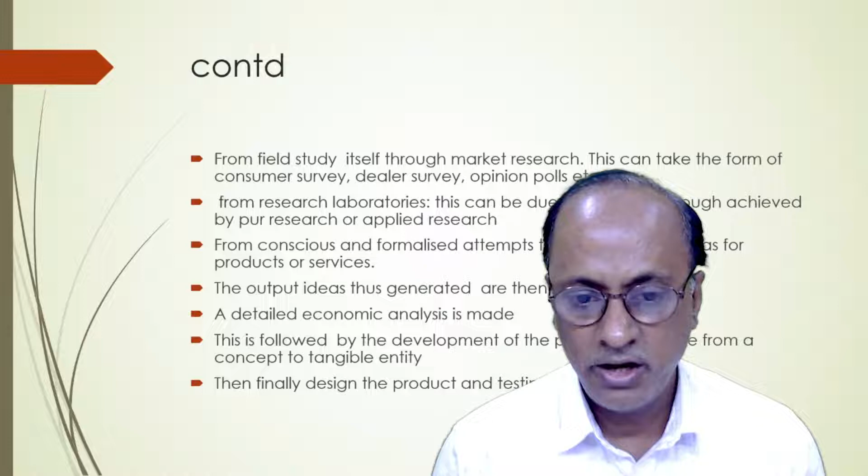And finally, design the product and test the product. When you design the product, many things come into our mind. First thing is product design. Product design contains product variety.

In product variety, there are two distinctly different priorities that can affect the design of a product or service. What are the priorities? The higher the standardization, the greater the ease in producing. Standardization means producing similar type of products in large volume.

But there are certain advantages in standardization. We use the same types of raw materials. We may use the same type of process. So we purchase raw materials in volumes. We may get certain discounts. So our unit cost may decline.

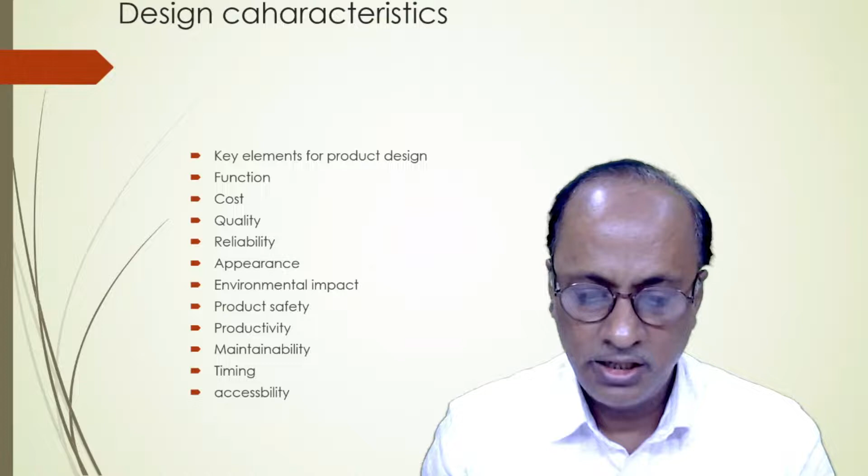Next comes process selection. Now once the product design is over, we move to process. Process selection is nothing but the ways the organization chooses to produce the product.

Process selection can simply be said as: whatever design, whatever product we selected, how we will produce that, what are the methods of producing that, and how we will provide the goods and services. It involves the methods we use to produce the product or provide the goods and services, including choice of technology, type of processing, and so on.

When you make a process selection, we have to decide the technology, what type of technology we are going to use, and type of processing. As I told you in the last class, there are different types of processing. It influences our capacity planning - as I told you, capacity planning means how much I should produce, what capacity my organization should have, so that I can meet the demand of the customers.

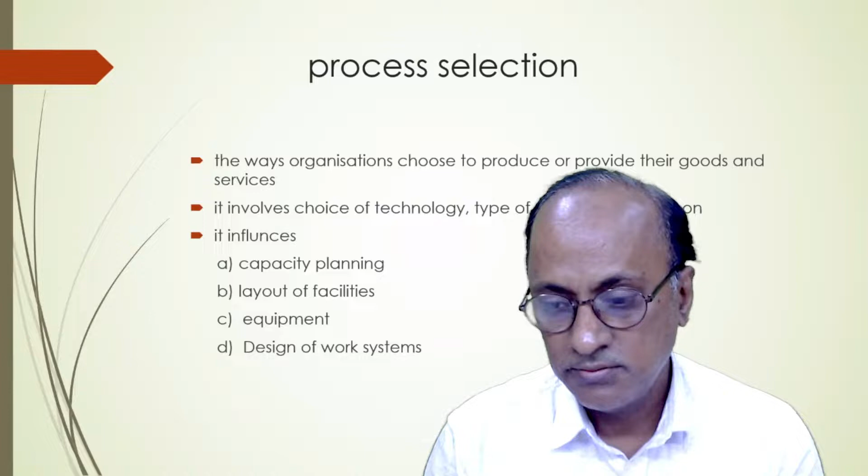So before going to the next slide, I can say that process selection is the method, the ways the organization chooses to produce or provide their goods and services. It involves choice of technology, type of processing, and so on, and it influences your capacity planning, layout of facilities, equipment, and design of work systems.

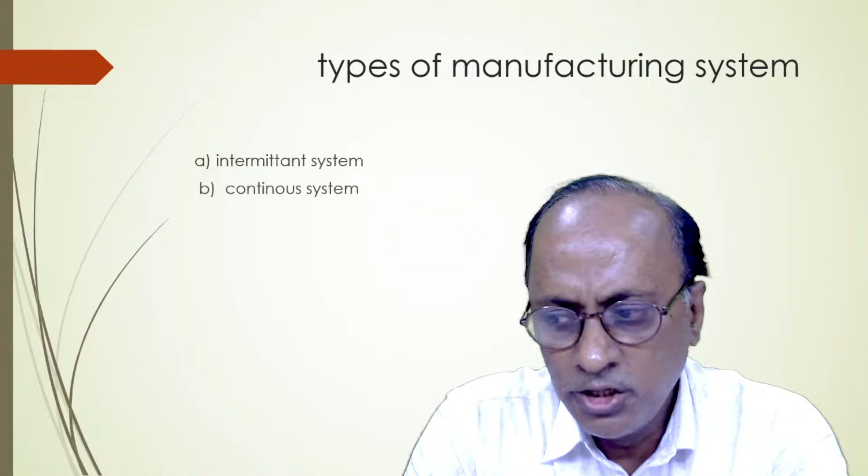There are different types of manufacturing systems: intermittent system, continuous system, and as I told you, we can also add batch system, job shop system, or project. All these are types of manufacturing systems. But basically, we can take manufacturing systems into two parts or two categories: intermittent system and continuous system.

What is intermittent system? Goods are made to specifically fulfill orders made by the customers rather than for stock. Production systems are flexible. Workloads are generally unbalanced. In-process inventory are large. Highly skilled operators are required. It needs high investment. Elaborate sequencing and scheduling are required.

Now, first, the definition of intermittent system: intermittent means we produce in intervals, we don't make a continuous production system. Here, goods are made to specifically fulfill orders. If customers come to me and ask me to produce something, I produce the product, and whatever date I have committed to the customers, on that day they come and collect their stitched clothes rather than for stock.

Now, in an intermittent system, I can give the example of a tailor. Many customers come and give their measurements and specifications, and the tailor stitches the cloth. He does not stock them, and he fulfills the orders given by the customer - whatever orders the customers have given, accordingly he fulfills them.

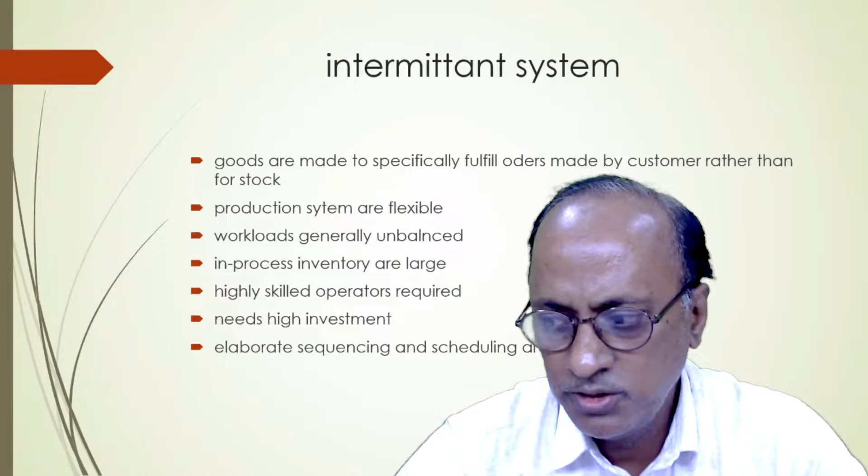In contrast to intermittent system, there is another system called continuous system. As distinct from intermittent flow process, all outputs are treated alike in this form of processing, and workflow is relatively continuous. The variety is small and volumes are high, making it worthwhile to focus the transformation process on the output. This requires arranging facilities in the sequence required for the output, using high-speed special purpose machines.

Now, if you compare intermittent system and continuous system: in intermittent system, the flow process is not continuous. We produce for some time, then stop, then produce again when customers need it. But in continuous system, the process is very much continuous, and the outputs are treated alike in this form of processing.

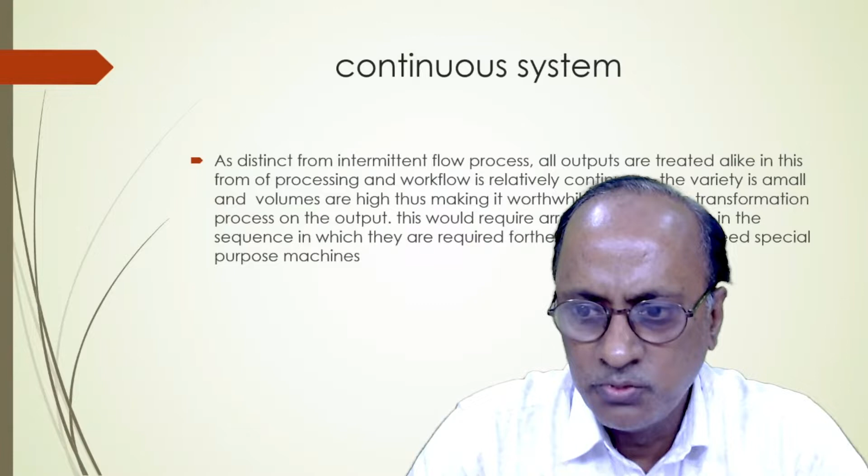The workflow is continuous, and in case of continuous system, the variety is very small. We don't find variety of product; we find standard products having the same specification and features. The volumes are very high. So in a continuous system, we arrange the machines and facilities in a particular sequence as required for the output, using high speed special purpose machines.

Characteristics of continuous process: we produce high volume products, meaning we produce in large quantity. We don't produce small quantity products. When you produce high volume products, the products are standard and similar, so it is easier for planning and control.

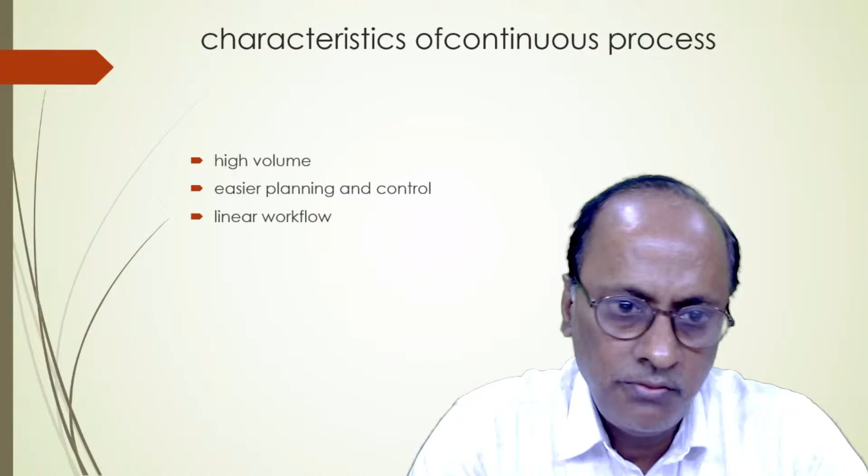Since the system is continuous, it follows a particular path or sequence, so planning and controlling becomes easy, and the workflow is linear, meaning materials move in a straight line. So it's a linear workflow method with no problem. These are the three characteristics of continuous process.

Now, we have certain advantages. When you produce in large volume, we enjoy certain advantages called economies of scale. When you produce in large quantity, our average cost, our unit cost comes down because of various benefits like economies of scale. We get marketing advantages, raw material advantages, and certain economic advantages. So all types of advantages are enjoyed when you produce in large volume.

Here we use one type of machines, or special purpose high speed machines. Operational skill required is very low here, and simpler managerial skills are required.

At the same time, there are certain disadvantages of the continuous process. This process is highly inflexible, difficult to adopt any change. Why? Because in continuous process, we produce a particular type of standard product, and the system is meant to produce that product only. We cannot produce any other product. So if there is a requirement to change the product, it's very difficult to adopt that.

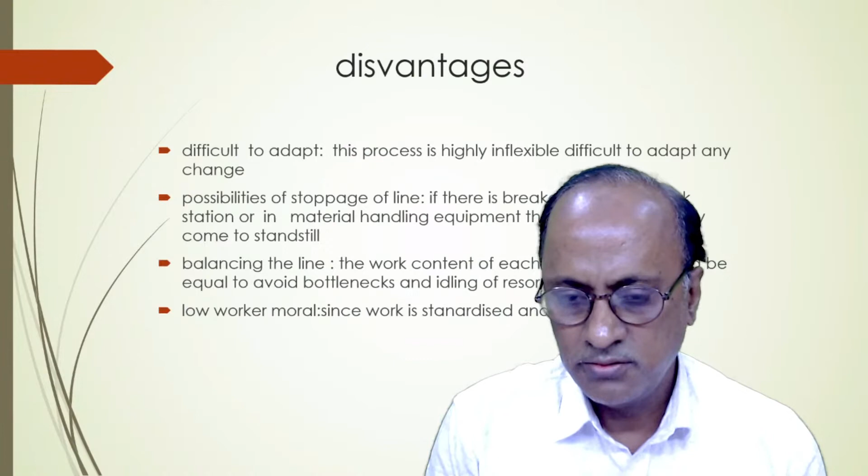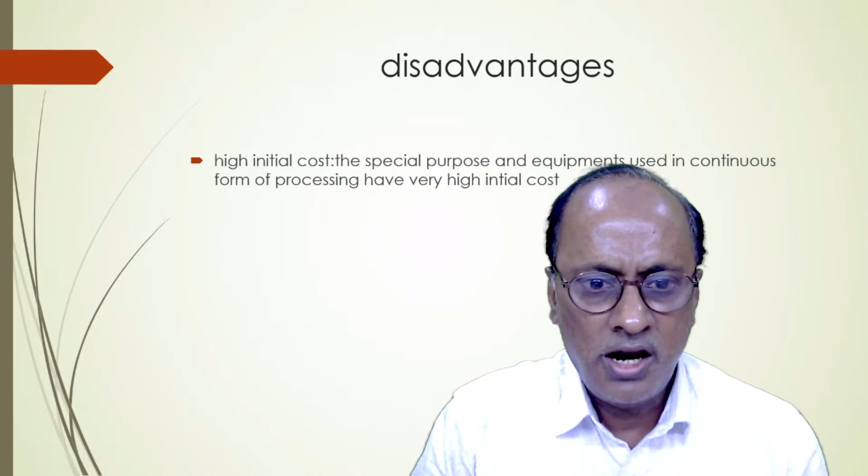Production of services: services could be produced using different processes, although intermittent processing form is a typical form used for services, and it involves a high initial cost.